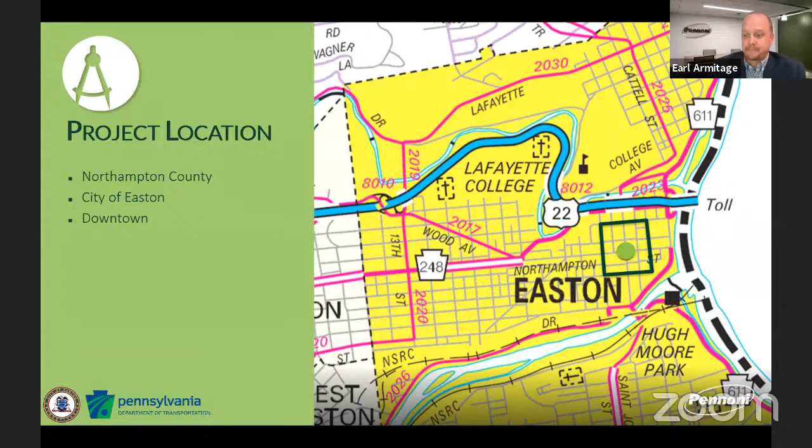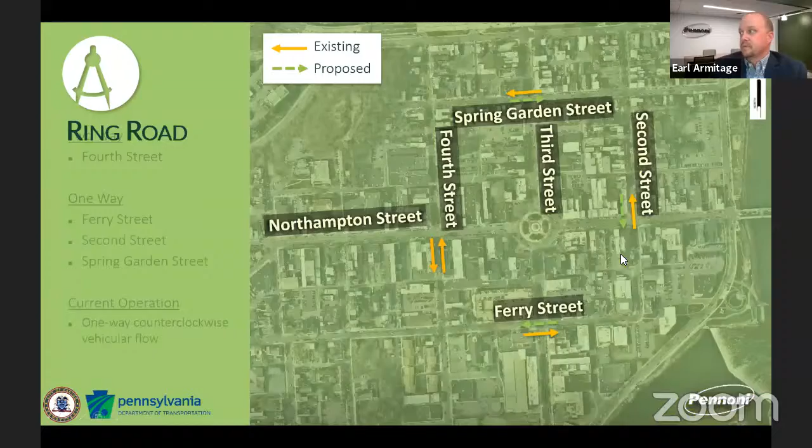So everybody knows the project location, we are in the downtown heart of Easton here. The roadways we're looking to convert from one-way to two-way, as Dave mentioned, are Ferry Street, 2nd Street, and Spring Garden. They're all currently one-way streets in a counterclockwise motion. 4th Street was previously a one-way street, as everybody knows, and has been converted to two-way.

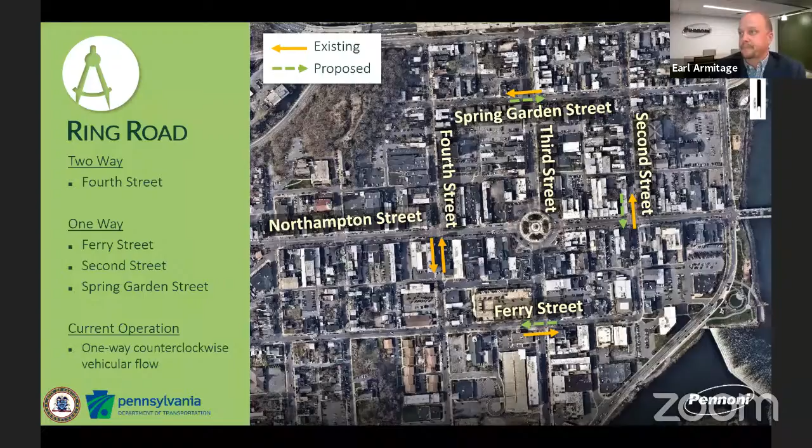This slide shows everybody the traffic volumes — these are average daily traffic volumes, pre-COVID, showing the number of cars that travel down each roadway each day. We had updated traffic count data since 4th Street was converted to two-way. Heading southbound there's about 3,400 cars, heading northbound there's already about 2,000 cars, which we found to be great, because on 2nd Street, which is still one-way, we have about the same number of vehicles heading northbound. So people are absolutely using the conversion.

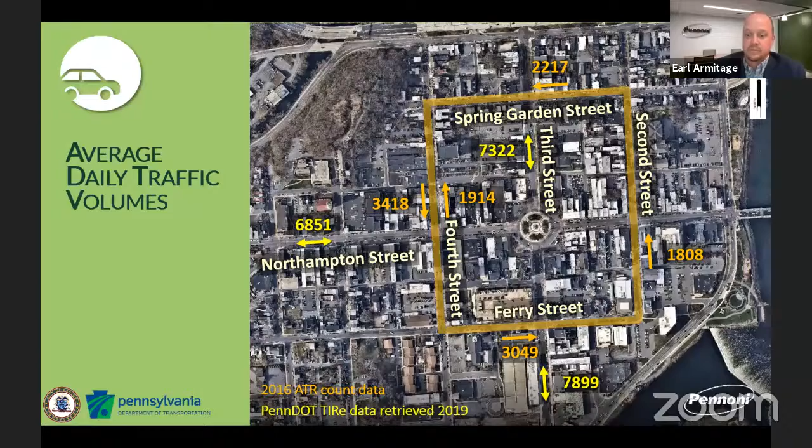Some of the project goals are to improve wayfinding, as Dave and the mayor touched on, and improve access to businesses and people's homes. Right now, with the one-way restriction, people have to go in one direction to get to and from their destination. One thing found when converting one-way streets to two-way is it helps with vehicle speeds — if you have a wide roadway like this that was one-way, people feel comfortable driving faster. Converting it to two-way makes the lanes narrower, which affects vehicle speeds, something we certainly want to slow down.

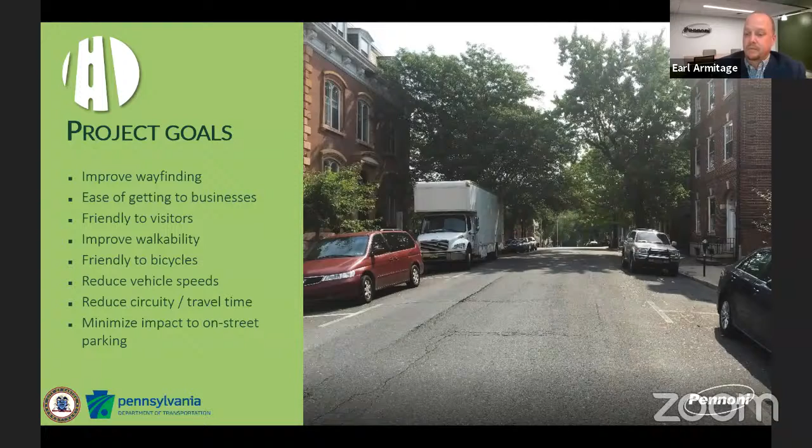As I mentioned before, this is the 4th Street pilot project, a very successful project. You can see the photo at the top before it was converted, and the photo at the bottom right once it was converted to the two-way flow.

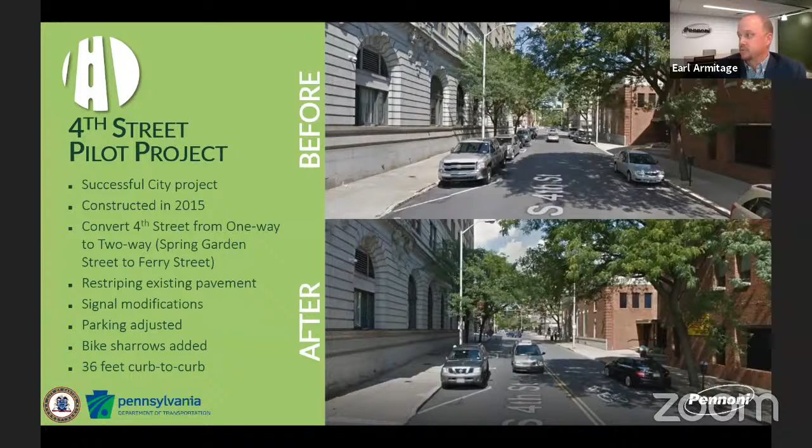This, believe it or not, was done all the way back in 2015, although it seems like about a year ago. We did signal modifications because we had traffic traveling in both directions, such as Northampton. We had to adjust the parking, going with a 7-foot parking space, which seems to be working really well. We also added bike sharrows, which you can see in the bottom right, the pavement markings for bicyclists.

The cross section of all 4 roadways is 36 feet curb to curb. So we divided that up into 7-foot wide parking aisles, and maintained 11-foot travel lanes with that.

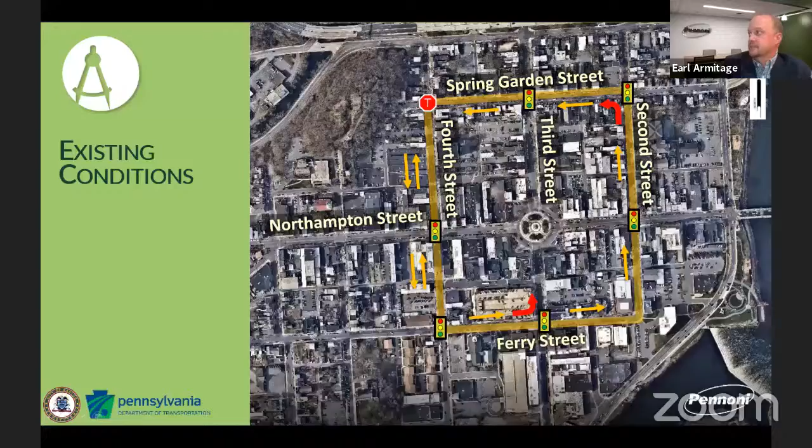This slide shows the existing conditions, where the traffic signals are and where the stop controls are. The next slide will show once we introduce the two-way traffic. One item I want to point out is the intersection of Ferry and 2nd Street is a little unique—there's a curve through there, with other driveways. So we're going to look at putting an all-way stop at that intersection, meaning you would stop on each of the approaches, which is common throughout the city at a lot of the heavier traveled intersections.

The intersection of Spring Garden Street and 2nd Street is currently signalized. As Dave mentioned, we really do take feedback seriously, and one of the comments we received at the public meeting, from a resident who lives nearby, was that this intersection would work better without a traffic signal. So we're looking at removing the traffic signal and installing an all-way stop condition there. In order to do that, we had to look at the traffic volumes, and the volumes will support that change.

The other 5 traffic signals will be modified, similar to what we did on 4th Street, to accommodate two-way travel. So this is a summary of everything on the Ring Road: we need to adjust the signals, adjust the timings, modify a lot of pavement markings and signage through those areas, and adjust parking meters as well.

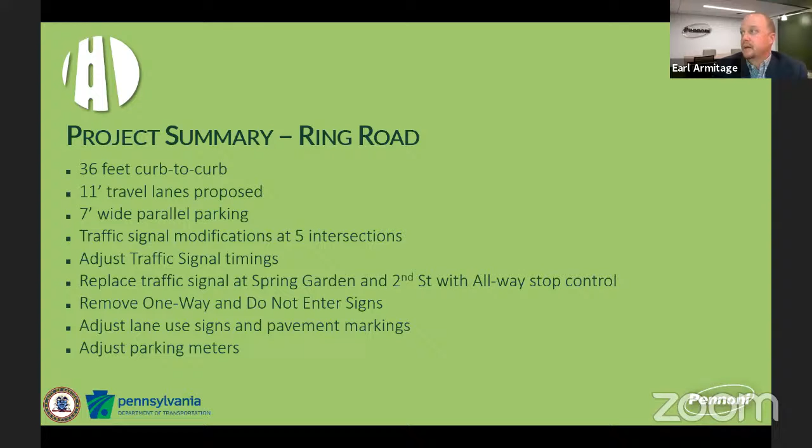Before I move on to Centre Square, a lot of the feedback we got from the community at our public meeting was very positive about converting from one-way to two-way. Dave and I talk often about the feedback he receives, and it seems like that change is really supported. And that leads me right into Center Square.

Earl, before you get into Center Square, I just want to add that I think the city and any number of its departments has been fundraising for this project for the past 10 years, and I think everyone's done a great job.

Just from PennDOT alone, we got 2.2 million, and we have about 900,000 for the park. But we're going to see things that we aspire to in our design that we may not be able to accomplish when it comes time to bid this out. So we may have to value engineer this at some point, but what you'll see is what we hope to accomplish.

Absolutely, thank you for that, Dave. Jumping into Center Square—this is the historic intersection of Northampton and 3rd. We'll talk about the farmers market. There is parking within the square, which we will touch on as well, and we have a very successful park in the center. I'm not going to read all the information on this slide, but it covers basically what my presentation is going to walk through, just general information.

On the circle itself, there are 2 travel lanes heading through. They're extremely wide lanes for anyone who has driven it or tried to cross—we have 20-foot lanes to travel around. As you saw on the previous slides, average travel lanes are anywhere from 11 to 12 feet wide.

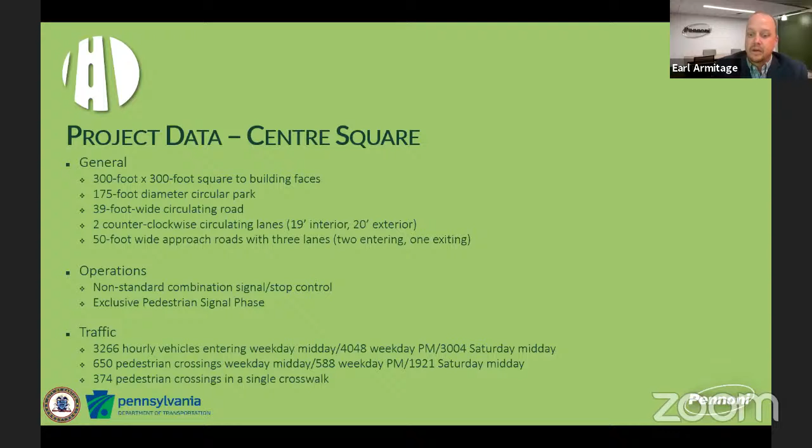I'll talk about the operation, though I think it shows better on future slides than trying to read through here. Under traffic, you can see the volume of pedestrians out there. It's very well used for pedestrian traffic. A lot of the feedback we received was to not focus just on vehicles, but to think about pedestrians and focus the design on pedestrians. So with that, I'll jump into the operation.

I would assume everybody knows this, but the inner lane of the circle continues around the circle. The outer lane is an exit lane. So if you move to the outer lane, there are cones and channelizing devices in place to help the motorist realize that they are now going to leave the circle. It's certainly an unconventional traffic signal operation, as we all know, and as PennDOT reminds me every time we talk about the project.

So let's get into that operation. The signal operation is: there is a flashing red for motorists entering the circle from any of the side streets. That means you will essentially stop and then proceed into the circle when you have an opening. If you're within the circle, you have flashing yellow, which is to proceed with caution around. This actually operates consistent with a lot of modern roundabouts you're seeing, not the circles that exist in New Jersey that are being ripped out, but the modern roundabouts being put in. You yield when you enter.

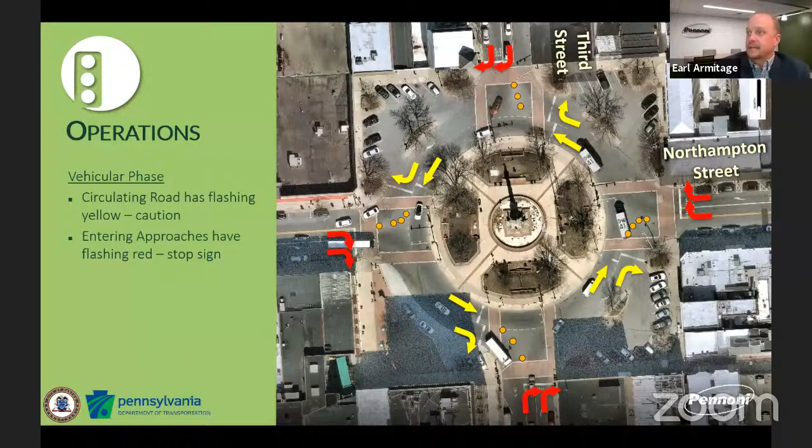The next phase of the traffic signal is for pedestrians, an exclusive pedestrian phase. That means you do not cross the intersection or cross into the park when vehicles are moving. Every approach to the signal is red, and a pedestrian gets a walk symbol to go either into the center or to cross any of the side streets. This is a recall mode, meaning pedestrians do not need to activate this. There are no push buttons you need to hit to get a phase to come up for pedestrians to cross. It makes it very efficient for pedestrians. They don't have to find the push button—they just wait, and when the signal cycles through, it'll give them that walk symbol to get across.

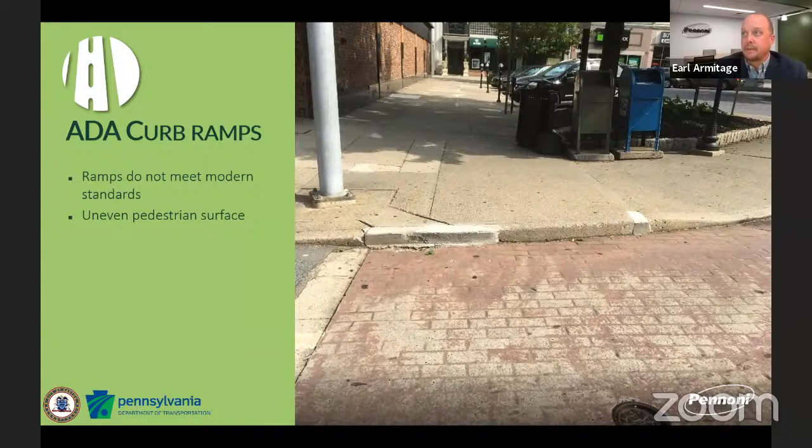David mentioned this—the circle has not been touched for a long time. There is a need to upgrade the accommodations, especially for ADA. We need to put in modern accommodations that meet everybody's needs, which is part of this project. Pavement is in poor condition. You can see here there's a lot of utility cuts, a lot of repairs done over the years just to keep everything smooth and flat. So we really need to improve this.

One of the items we're looking at doing is taking out the entire crosswalks here with this depressed curbing. This is a concrete curb—it expands and contracts separate from the asphalt paving, always creating joint issues. So we're looking to do a stamped asphalt crosswalk. It's extremely decorative, looks very nice, and lasts a long time. We have photos of these crosswalks installed, and we take a photo every year for many, many years, and they last a long time. So that's what we're looking to put in with this project. It lasts almost as long as the asphalt will last.

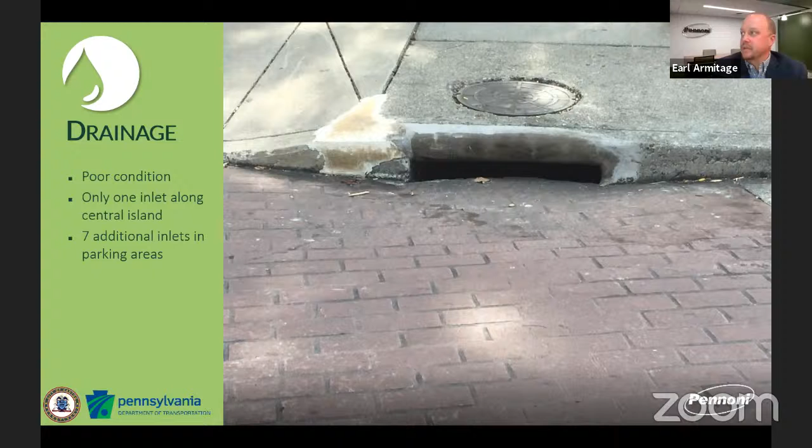Drainage—right now we only have one inlet along the center island. This isn't very glamorous drainage, but it's something we want to look at and accommodate. We want to make sure we don't have ponding issues, and that with the work we're doing, we can get the water off of the street as quickly as we can.

We mentioned this—we did develop a lot of alternatives, some of them very innovative. We looked at closing down certain streets, closing down certain approaches to the circle, pretty much everything. We really wanted to take a full look at any alternative that could be implemented at the circle. We got input from city staff and from PennDOT, and developed all those alternatives at different levels based on the feedback we got. Some of them we could just throw out very early; others we wanted to further analyze to see how they would work. We had our public meeting in December, very well attended, and people filled out information cards.

All of that was included in what we call an alternatives analysis report that was submitted to PennDOT. I did have a conversation with PennDOT, which I'll talk about later, going through what alternatives they liked and where we're coming out of that alternatives analysis phase.

We updated some of the information on the web page this summer. For anyone that went on the web page, you could find new updates on where the project stood. We essentially selected a preferred alternative to move forward with in September, just last month. So I'm going to get into that now.

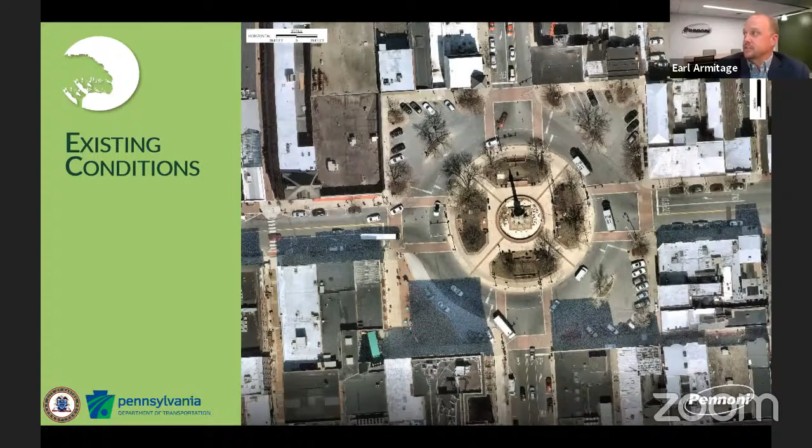People get confused. They don't know which lane to be in. There's a lot of people trying to change lanes within the circle. So we feel that this would really simplify the traffic flow. And with converting all the one-way streets around here to two-way streets, there's a lot of alternatives for people in different ways they want to go if they're in a car to get to and from their destination.

The primary goal of this project, and a lot of what we heard from feedback, was let's accommodate pedestrians, let's improve that experience for the park and for the destinations in downtown. So that's what this project does.

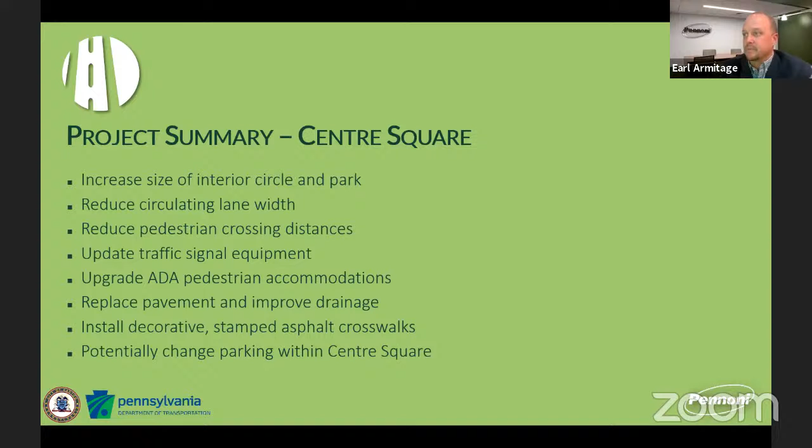So real quick, this is just a summary of all the items I talked about of what we're trying to accomplish here, primarily focusing on the pedestrians, focusing on the events in the square, and really focusing on the park. It really does need a facelift. A lot of the items, as you saw in the photos, and anyone that's out there on a regular basis, it certainly can be improved, and that's what we're looking to do.

Let's get into the fun stuff of the budget and the schedule before I turn it over to Jaspreet. The budget.

So the Transportation Improvement Plan, or what you commonly refer to as the TIP funding, the PennDOT funding is $2.1 million, and that is secured. There's a lot going on with funding across the state, at a local level, a state level, a federal level, but that is on the 2021 TIP.

It's money that's locked up. There was also turnback funding. The city took over a couple of streets, I believe it was Northampton Street, from PennDOT, and they received funding for that. That is $665,000.

So the budget that we're working towards with this part of the project, the PennDOT project, is just over $2.7 million. That will be for the items I showed you with the two-way conversion and the square, center square.

Schedule-wise, preliminary engineering we're looking to complete essentially now. We're basically wrapping that up as we're talking. Final design is going to go very quickly. We're going to look to get that wrapped up in early 2021. And then we're looking to get this out on the street for bids and get a contractor moving in the summer of next year, with about a one-year construction season.

One of the points that Dave has hammered home to me very often is that we really need to coordinate the schedule with the community and with the events. So we don't have an exact schedule laid out, but as we get to that point and we're ready to bid this, we have flexibility to put certain restrictions to the contractor on when they can do certain work. We're looking to get in and get out as quick as we can and get this work done.

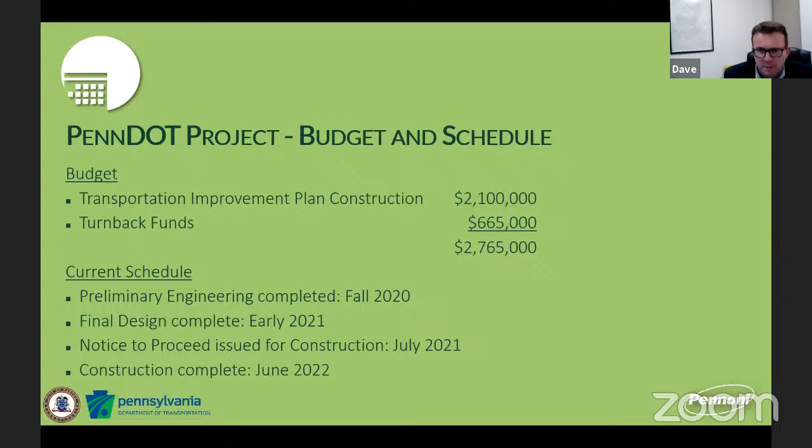Absolutely. So with that, I don't know if we're going to save all questions to the end or move on to the Center Square Park renovations real quick. We can move on to the Center Square Park and take questions at the end. Perfect. Okay, I will turn it over to Jaspreet from our office, who will go through the next couple slides.

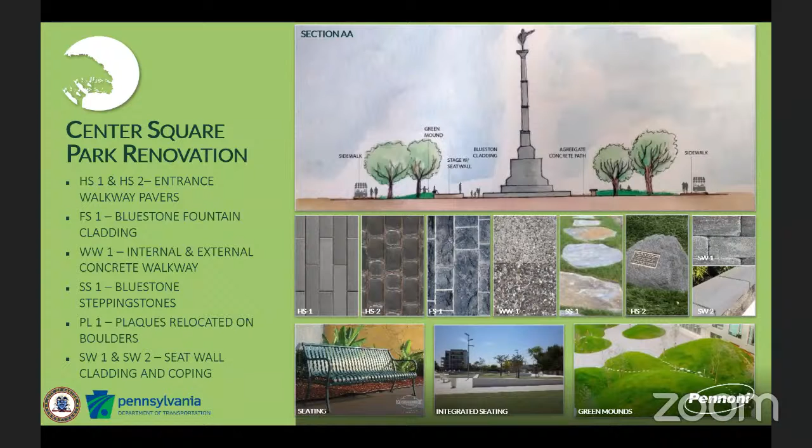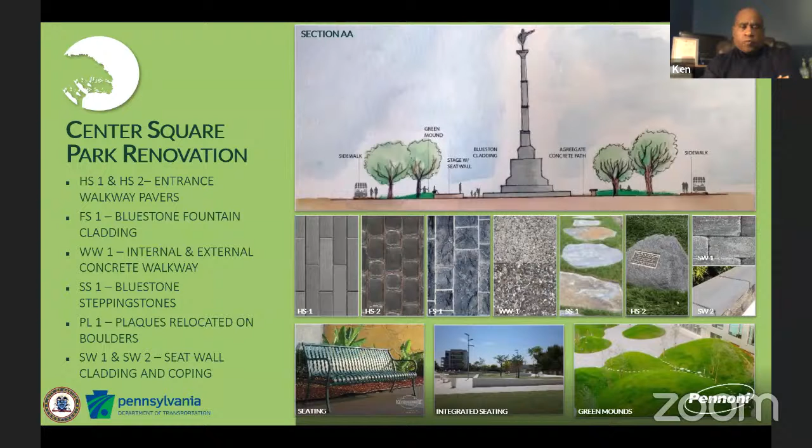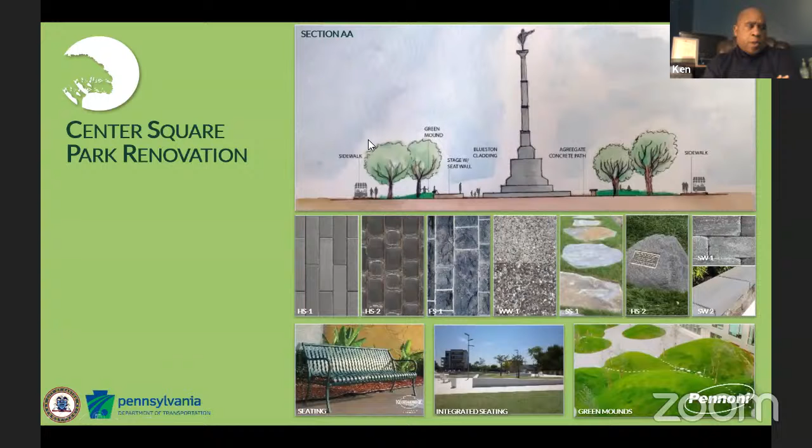A comment, actually. It looks to be that it's going to be more interaction going on than it is right now, which really makes me happy. The crosswalks, to have them shortened, not only makes it safer, but I'm sure Mr. Marley would be grateful for the shorter walk that he always talked about with timing of the lights. So it looks really good, the blueprint anyway.

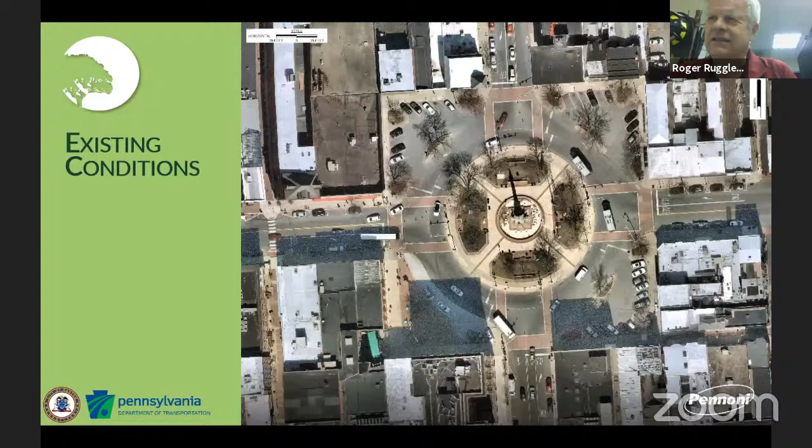It appears as though the center circle has a lot of, I'll call it topography change. And I know that they set up a lot of tables there during the farmer's market. And my concern would be is there's a lot of mounds and things like that, that's not conducive to tables.

Roger, referring to one of the things we were trying to accomplish there, you may have noticed that there's relatively no grass left in the circle. What we would want to do is try and get the vendors set up on concrete versus taking over the grassy portions. Maybe we could reserve those for a less intense use, but with the pounding it gets every Saturday, we've had to mulch probably 50% or more of what used to be existing green space. So that was just intended to be a change in topography to provide seating and even some fun for kids when they're in there.

Well, I mean, what I was referring to was they set up tables for people to sit at and drink coffee or whatever within the circle currently. I mean, before COVID.

And I'm just asking, as far as the topography is concerned, the renderings didn't look as though there was a lot of flat surface in that green area, and that's where they typically had the tables. I think, as David said, one of the things we will require the farmer's market is to use the new 20-foot addition of poured structured concrete rather than the grassy areas for the vendors, because it just doesn't look as good as it used to be.

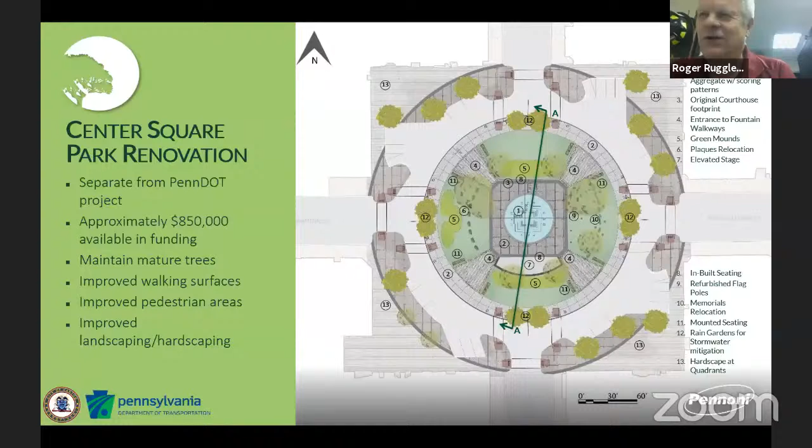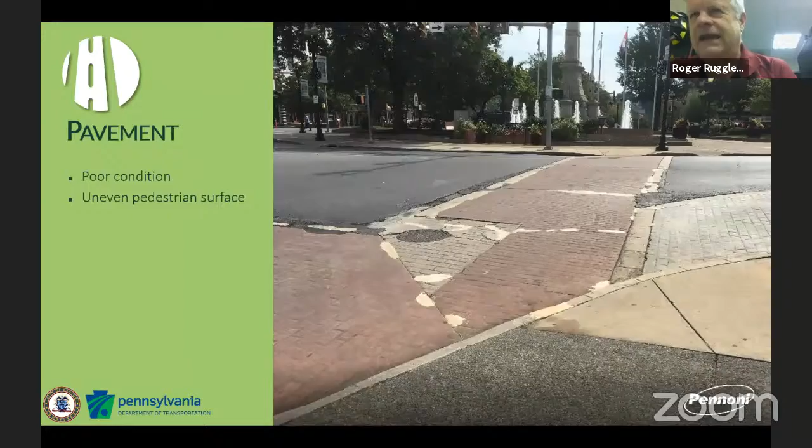I'm sorry, this is backing away from the circle, but something you had covered earlier. We were talking about the Ferry Street and 2nd Street intersection, and how that is going to have a stop sign at it. How does that work with the 2 driveways that are going to be right at that intersection?

You're talking right here, at 2nd Street and Ferry. So they would also be stop controlled, and that was one of the concerns we had. If we just allowed this to be free flow, meaning people could come and make a left turn from Ferry onto 2nd, and make a right turn from 2nd onto Ferry in front of the post office, we had concerns that it would be difficult to see around that corner, and you do have those other driveways coming in, which you mentioned. So in order to control that, our proposal is to do an all-way stop. It'll also help with pedestrians - if anyone wants to cross at that intersection, it'll stop the vehicles there.

Earl, will there be a prohibition of tractor trailers going down Ferry Street except for local delivery? That's something we can absolutely look at. I can't see a tractor trailer necessarily wanting to avoid the circle going down Ferry Street and trying to make that loop onto Second, if they don't have to. If it's a local delivery like the post office, they're going to have to deal with it, but keeping non-local traffic out of that intersection would be helpful. No, that's a great point, I'm going to write that down.

The other thing I would like to point out at that intersection, I don't know if you've considered it or not, but currently there are parking spots along the post office itself where people going to the post office can get out and go in. If we make that a two-way, then those parking spots would only be available essentially to the people coming south on 2nd Street. Anybody that comes in the way they normally would this time from Ferry would be on the opposite side of the street where we may not have parking available for the post office.

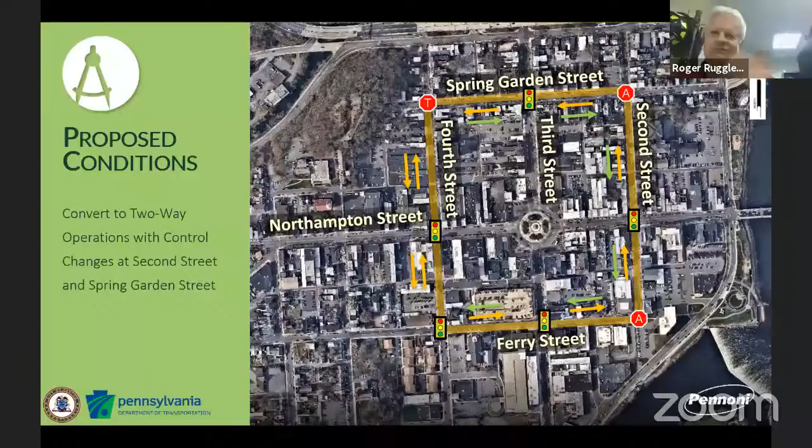I understand what he's saying. City council could automatically do that without this plan. They can put 15-minute pickup and drop off spots along where Project of Easton is and along where the bookstore is on the east side of 2nd and the south side of Ferry, if that be the case. We have two more, it seems like we're doing a lot of 15-minute pickup spots throughout the city, and I think that's something that will have to be looked at eventually, but this would be a good spot for some of them.

No, you're exactly correct. The city has the authority to control the parking. So if that's something we want to implement as part of this project separately, council has that authority. And Mayor, we could even sign it so that it was only in that condition for the hours of the post office, and outside of that, just allow metered parking.

That's an excellent point, David, because of all the restaurants there. You have 3 restaurants along Ferry Street that are very busy, so at night there's no sense in making them 15-minute spots.

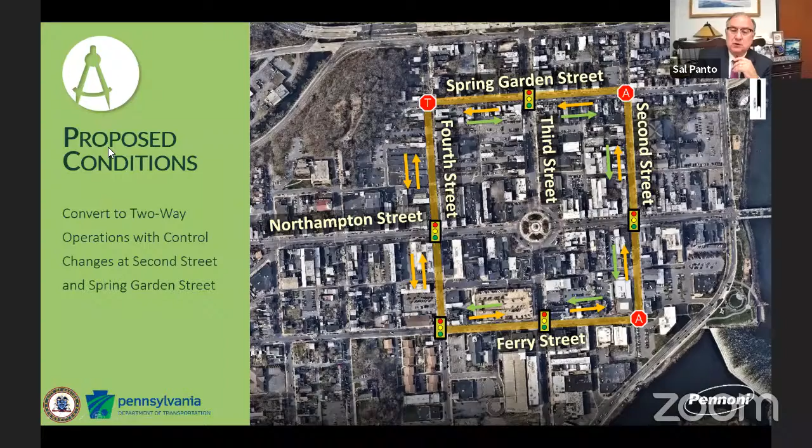That's a great point. Mayor, may I say something? Councilman O'Connell, I don't know how this would impact the potential design, but I think the farmer's market is thinking about making Larry Holmes Drive a more permanent home, so I don't know how often they'll be coming up to the circle.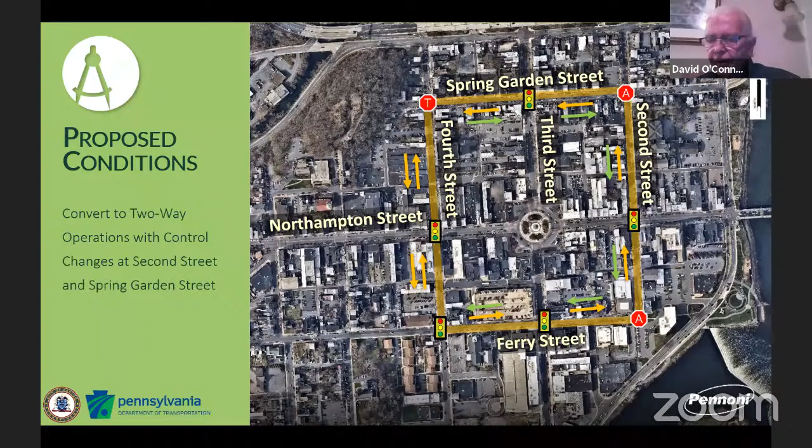Well, that's a good point. I think you're just absolutely thinking about it right. That decision hasn't been made. We tried to get them to move several years ago and they didn't want to. Now that they're down there because of COVID, the farmers themselves seem to like it down there better. However, the merchants in Center City don't like it because they're not seeing any reciprocal shopping that would take place on a normal Saturday, even in the public market, which is also GEDP, as you know.

So in my own personal opinion, as we talk about this, it's primarily a place where people can socialize. We're not making the circle 20 feet wider just for the farmers market, it's for everything that we do down there. Everybody wants to have events in the circle, that's just the way it is - Bacon Fest, Garlic Fest, Heritage Day, concerts, everybody wants it. The amphitheater is a beautiful place to have a concert along the waterfront, but where most cities want to use the waterfront, our center square is such a public space that people want to use it.

As I understand from being down there most Saturday mornings, the farmers who have stands really like it down there for a number of reasons. One, GEDP has garnered free parking at the Haver building, which allows people to walk to the market and back to the car without paying for parking. Secondly, it's not a social event there, people come to shop and leave - unlike what Dr. Ruggles was talking about, with people sitting down having a cup of coffee and staying for 2 or 3 hours. Myself, I'm there for half an hour - I go down, get what I need, and go home.

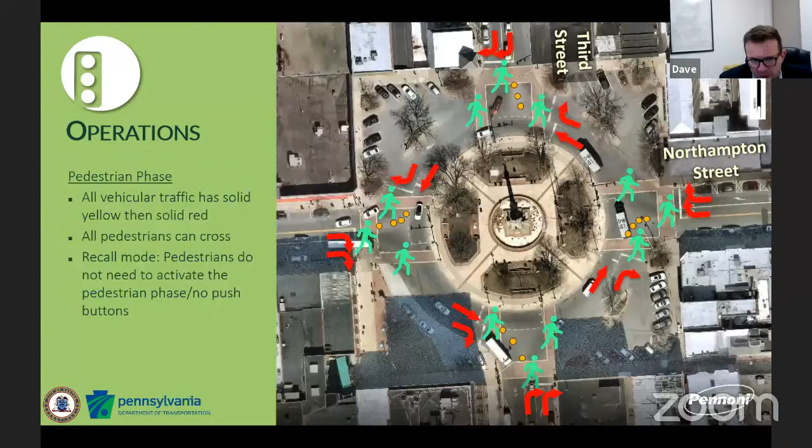Well, it's tough to say how it's going to be phased. Probably not a whole lot from any of the inner park work. We would need to figure out the phasing of traffic, and that's something we haven't gotten to yet because obviously we wanted to get more public input before we proceed with final design.

But Earl, I would assume that there might be an option to maintain traffic through the circle for most of the project. Our goal is always, like it was in 2012, to lessen the impact to the businesses. I can't sit here and say that there's not going to be disruption and noise, but we just need to think through how we phase the work and give alternative means. One thing off the top of my head is it would make sense to do the two-way conversions to give people more options to get around any disruptions.

Yeah, and one of the great advantages we have here is that the travel lanes are so wide. Typically when we have to do road work, we have a 12-foot lane and a 2 or 3 foot shoulder, and we're trying to shift vehicles around. It's very hard to set up. Because we have 20-foot travel lanes, we'll be able to maintain traffic through this project almost the entire time, except for when we have to physically remove the crosswalks. And even then we can do that in sections. So as Dave mentioned, we haven't figured out the final traffic control, but we've definitely thought about it, and we think we can maintain traffic as a single lane for the majority of the project.

That's good. Okay, thank you. Any other council members have a comment or concern? Seeing none, I'll move it over, open to public hearing.

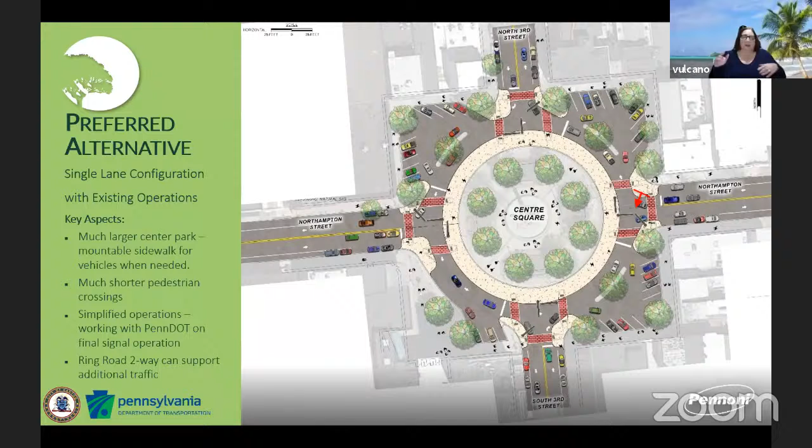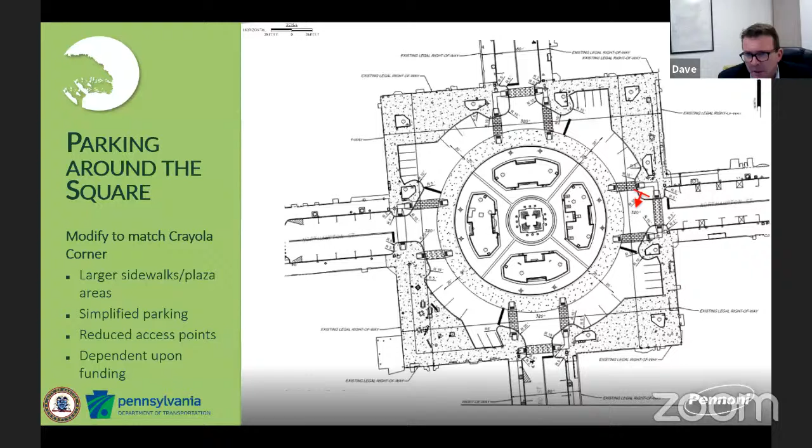Currently now there's 10 in each. That would go down to 8. But another thing to keep in mind is that each of the quadrants currently has a 15-minute meter, which they do get used, but anyone who wants to stay longer than that, it doesn't really do them any good. So I think providing the 32 spots, I don't think it's going to be noticeable over time.

And I think David brings up a good point, speaking of the post office, those 15-minute spots become useless after 5 o'clock because the retailers are closing. Where you would run in and pick up, like if you went to Chow Sandwich or Josie's, that's where your 15-minute spots are used. So what happens is they lay fallow during the evenings because people can't park there when they're going for dinner, which may be an hour and a half or 2 hours. So we need to be able to, with our new smart meters, let them be longer after 5, 6, or whatever time we set.

But that will only create 2 spaces less per quadrant. If we are fortunate enough to have enough funding to do that, we always look at cost benefit and whether the project outweighs what could be a slight inconvenience of going from 10 to 8. In this case, I think our collective thought was that having that much plaza space, given our recent experience with the restaurants out there and a more vibrant space, it just gives more opportunity, and we still have adequate parking.

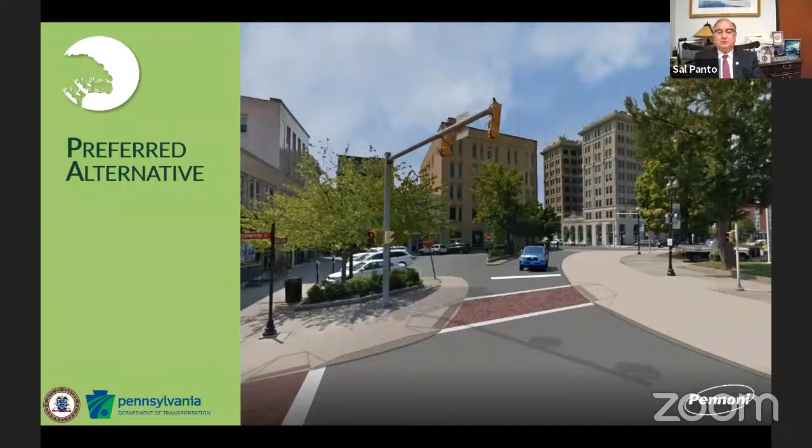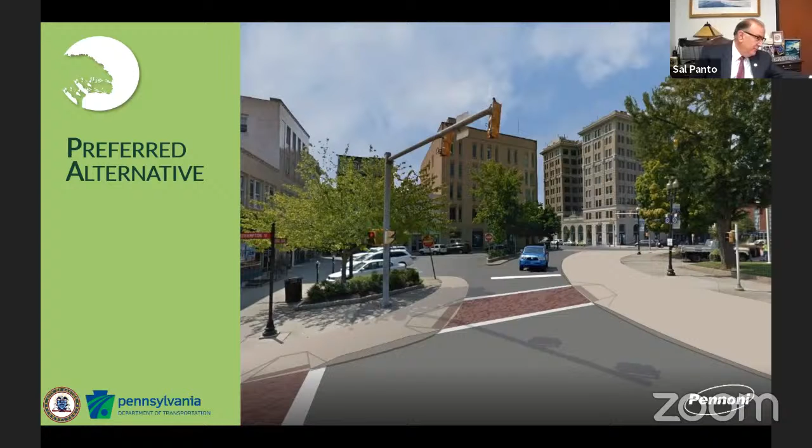That's really it. Well, we thank Pennoni. You've always been good for the city and our public projects. Earl, I appreciate your comments, and Dave Hopkins for your ability to represent the city so well. I think this project's an excellent project. It does not violate my 11th commandment because it really doesn't create the ring road that was created back in 1970. I just remember that project where you couldn't go into the circle and it was just a mess. But I think one of the things I like the most is expanding the ring road to 2 ways. I think that really helps the project a lot, helps the downtown circulation pattern, and helps the businesses. As a retailer for 28 years, PennDOT constantly was talking about possibly making Cattell Street one way and McCartney Street the other way. In retailing, if you're a business, you want cars to pass your business, and you're going to reduce it by 50% automatically. So I think that'll help our downtown merchants, especially the ones that are on the ring road. Now they'll be seen. So thank you, Earl.

Jess Breed was on it. I was trying to remember which one of your people were on, and my phone's going crazy. So thank you, Jess Breed and Earl, and all the other people who worked with it on Pennoni's behalf. Great. Thank you very much.

Will you have to take it through PennDOT for final approval once we have our comments? Yes, and PennDOT's been great to work with. They recognize that these are city streets; these are not state roads. They remind me of that often, so they have deferred a lot of the items to the city.

Good, thank you, Dave. Any closing comments? No, Mayor. Thank you. Okay, I'll close that public comment hearing. The hearing on the traffic pattern in downtown Easton and the park project for the circle.